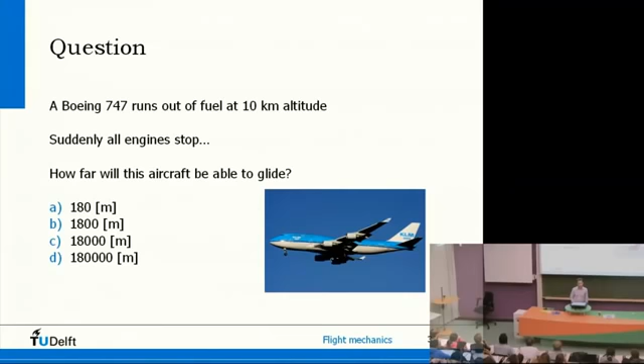Now, of course you want to know what the correct answer is. I've made a picture. This is if this happens above Amsterdam, then that circle, that's 180 kilometers. So the answer is D. That's what you can reach with this aircraft. So you can even fly almost to Brussels without engines operating.

Now, to come back to the lecture, this is typically a thing you'd like to calculate if you talk about flight mechanics. So what I'm going to talk about this whole lecture is aircraft performance, things like how far can you glide, how fast can you fly, how slow can you fly, how high can you go, or if you want to fly from A to B, how much fuel do you actually need, or what's the furthest you can fly. These are typical questions you should be able to answer at the end of my lectures, hopefully.

And that's for a given aircraft, you can do these calculations. But I will also talk a little bit about aircraft morphology. I'm not sure if you know what morphology means, but morphology is basically related to the shape of the aircraft. So if you know how far you can glide, you can think, well, what if I change my aircraft design slightly? Would I then be able to glide further or not? So aircraft design, wingspan, etc., is really much related to aircraft performance.

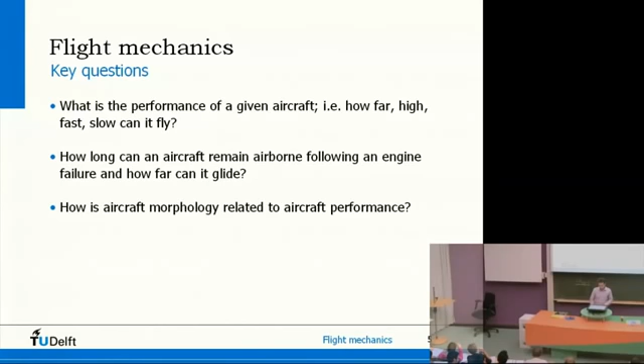So that's aircraft morphology. These are typical questions I'd like to answer, and it's important to realize that we try to analyze the performance of a complete vehicle. So it's not just aerodynamics, it's not just structures, it's not just propulsion. This deals with the whole vehicle, including the pilot, the atmosphere, and so on. So you can look at all these types of aircraft and do calculations about them.

And then next year there's a course on flight and orbital mechanics. Then you'll even start doing calculations about orbits and space flight. I won't be telling you that because I don't know anything about space. So in this lecture series it will be only about aircraft.

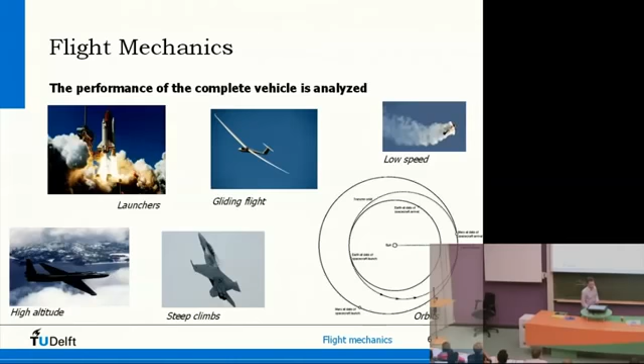So we're trying to analyze the performance of the complete vehicle. And of course, if you want to know how far it can glide or fly, you have to be able to describe the motion of the aircraft as a whole. So this is why basically the center of my lecture series is about the equations of motion of an aircraft. So that's basically F equals m times a.

So this is what we're basically going to do. It's not more than high school physics, really. But of course, the forces determine the acceleration of the aircraft and thus the motion. So you have to be able to understand all the forces that act on the aircraft.

This includes propulsion, aerodynamics, the aircraft structure, in the sense that the aircraft structure will have a certain weight. And you can imagine that maybe a heavy aircraft might perform less well than a not so heavy aircraft. The pilot has an influence too. Of course, the pilot can decide, am I going to fly high in the atmosphere or low, or what kind of strategy is the pilot actually doing?

So this will also influence the performance. And finally, the atmosphere. Of course, at high altitude or low altitude, you have different air density, different temperature, and these parameters affect the equations of motion and thus the performance of the vehicle.

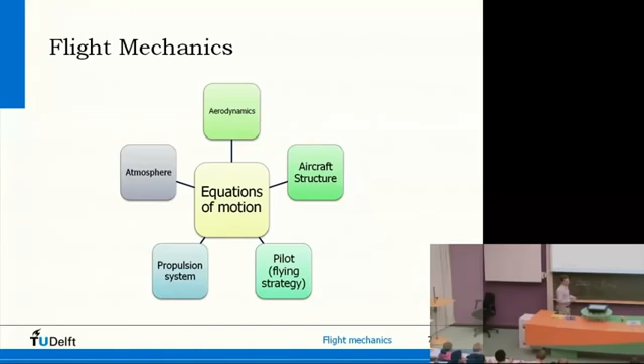So this is more or less what this whole lecture series is about. Hopefully you know now what flight mechanics is, more or less. Before I go into details of this course, just some practical matters like what book do you need, which chapters do you need to learn.

After that I'm going to treat three things basically: the general equations of motion, that's what you really should be able to do after this lecture, and points 4 and 5, propulsion and aerodynamics. They partly cover what you already know a little bit, but I'm going to extract what you know already to be able to apply it to the equations of motion. Finally, a summary and some additional stuff for the interested reader.

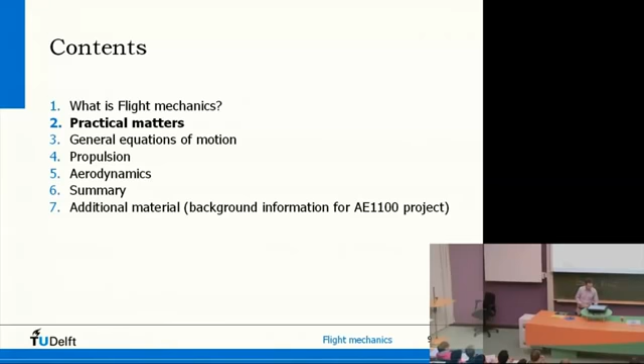So this is what I'm going to do. First lecture is more a general lecture, introduction, deriving equations of motion. And that's the tool really that we're going to use to solve all the questions that we may pose.

After that, I'm going to look at horizontal flight performance. So performance questions like how slow, how fast can I fly, what's the maximum distance I can fly if I stay at a constant altitude.

After that, it's going to be a little bit more involved. I'm going to treat climbing and descending flight, so the example I've just given, but also maybe if I want to climb to my cruise altitude, how fast, how much time does it take before I get there?

And finally, fourth lecture is the flight envelope. And the flight envelope is basically a diagram which more or less looks like this, with altitude and airspeed, and there will be some region in this flight envelope where a certain aircraft can fly. So there will be maximum speed limits, maximum altitude, minimum speed limits.

And within that region you can fly, and that's really important to the person that's operating the aircraft, because then you know what you can do with your aircraft. So this really tells you what the aircraft is able to do. Now clearly, airspeed and altitude, this flight envelope really depends on the altitude.

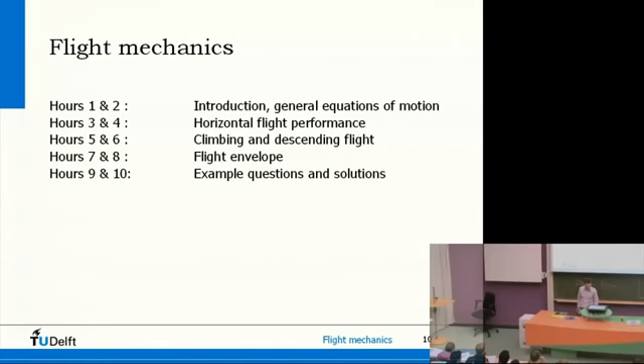Now, what do you have to learn? You have to learn the lecture sheets. If you understand the sheets that I show you in this lecture, then you know pretty much everything there is to know. There will be practice questions from previous exams on Blackboard, so you'll be able to look at them.

If you use Introduction to Flight, it's those paragraphs listed there, but I have to say that not everything that I'm telling you here today and in the next lectures is in fact included in Introduction to Flight. In addition, I don't think Introduction to Flight is a very good book. Well, it's a good book if you're interested in aerodynamics, but considering this topic, it's not a really good book, and they use different notations than I do.

So you can use it as background reading, but if you understand the sheets and you make some notes during this lecture, then you should have everything you need to know. There's also another book you could buy, it's only 14 euros, called Elements of Airplane Performance. It's not a waste of money because next year you'll need it anyway, so you might consider buying that. But that's up to you.

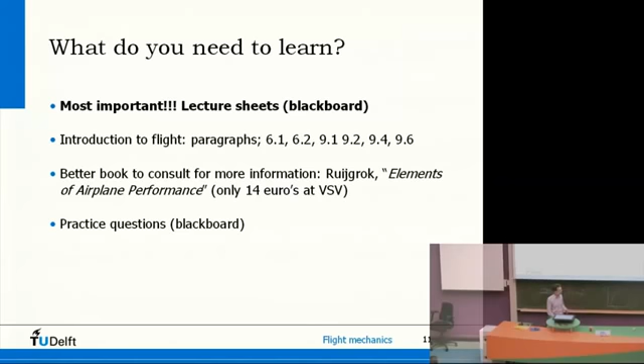Of course, everything I tell you will be put on Blackboard, but I will only put it on Blackboard after the lecture, so you have to wait for that. And there's no need to do any homework, so you can just come to the lecture and enjoy and pay attention, of course. But there's no need to really prepare for these lectures. Just pay attention, that's the most important thing. So,

General equations of motion, this is really the most important part of the lecture. So I'm going to derive equations of motion for an aircraft. And I'm going to do that in a couple of steps.

I'm going to talk a little bit about Newton's laws, stuff you should really already know. I'm going to talk about coordinate systems. You can imagine if an aircraft is flying through the sky, then you need to define some axis systems to specify what the orientation of the plane is.

Then I'm going to talk about some assumptions. We'll make some assumptions to make life a little bit easier. And then we'll derive equations of motion. So,

now to start with Newton's laws, this equation really only holds when you're in an inertial frame of reference. And what does that mean? That's a frame of reference, so a coordinate system with axes, which is fixed in space and it's not moving at all. So it's completely at rest.

Now, a coordinate system which is translating at a constant speed, you can prove that that's also an inertial frame of reference. And just to give you an example, let's say you were in a train and all the curtains are closed and the train is going at a constant speed, then, except for some vibrations maybe, you don't notice at all that you're moving. So you can jump in the train and you'll land in the same spot. So that's in fact an inertial frame of reference, and the equations of motion there hold.

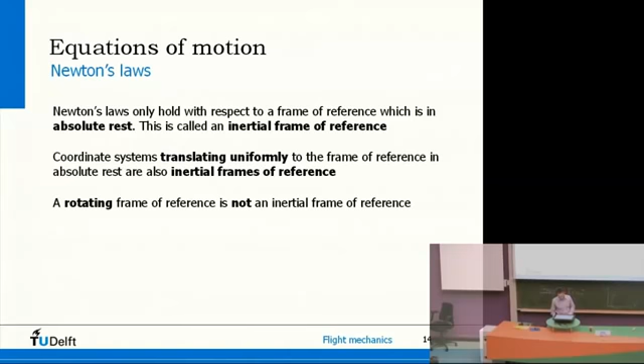But that's an important observation, because an aircraft which may be pulling up is, of course, going around the corner. So in that case, an axis system fixed to an aircraft is not in an inertial frame of reference anymore. So this is the basics.

And then for this picture, I would urge you to make a drawing. So take out your notebooks, I would say. If you would look up all the previous exams over the past couple of years that this course has been existing, I think there's been 4 exams, then in every single exam, there was a question whether you could draw this. So, I don't know much about statistics, but there's a fair chance that it will be asked again.

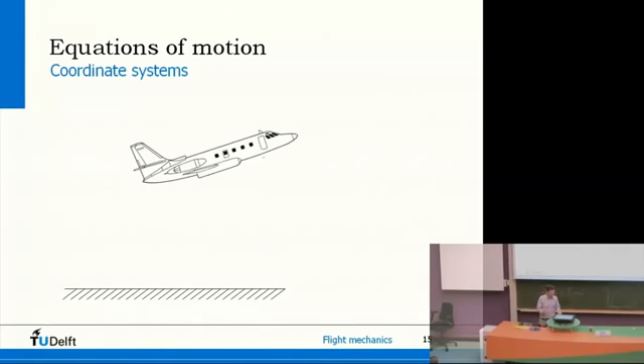So, coordinate systems, there are various coordinate systems you can actually describe. Of course, one that's really relevant and obvious is an axis system which is fixed to the Earth, like here. So basically, this is what we call the Earth axis system. Out of convention, you can choose whatever direction the x-axis is located. It doesn't really matter a lot if the aircraft is flying in that direction or in that direction for your calculations. So the x-axis, you're free to choose which direction it is.

The z-axis here is pointing to the center of the Earth. Now that's just an agreement. You could have chosen it the other way. This is the way it is, and it's completely fixed. So this thing is fixed to the Earth, it's not moving.

Now, of course, the plane is moving around. So you could also say, I take this Earth axis system, I take the same orientation as the one fixed to the Earth, but now I fix it to the plane. So this is what we call a moving Earth axis system. So it's the same axis system, same orientation, it's just traveling along with the plane. And that's quite convenient.

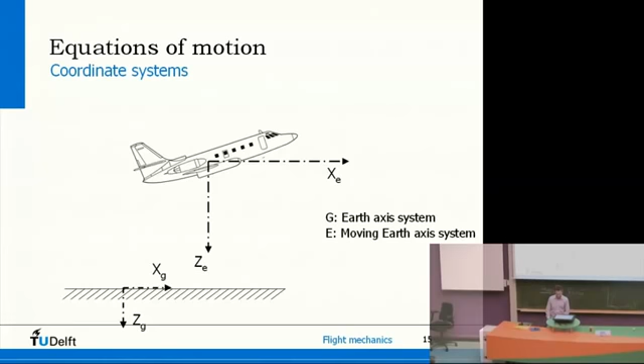Now, once you have this, then of course you can imagine there will be other axis systems, because a plane is not always in a horizontal attitude. So what we can also define is what is called a body axis system. Now, the body axis system is fixed to the plane, and the x-axis is pointing through the nose of the aircraft. So you can see straight away that there's an angle called theta.

Let's see if this works. Oh. I'm not very good at these things.

Well, doesn't work. So there's an angle theta between the moving Earth axis system and the body axis system. And the important thing to realize is that that's basically the angle between the nose of the aircraft and the horizon. So that means that the pilot, if he or she looks outside the window, is actually seeing that angle theta. So that's quite relevant from the pilot's perspective. Now again, the z-axis is just perpendicular to the x-axis.

Then, of course, and this is quite important to realize, there is something called the airspeed vector. And that vector indicates in which direction the plane is going. And that's of course interesting, because that determines the performance, where you're going.

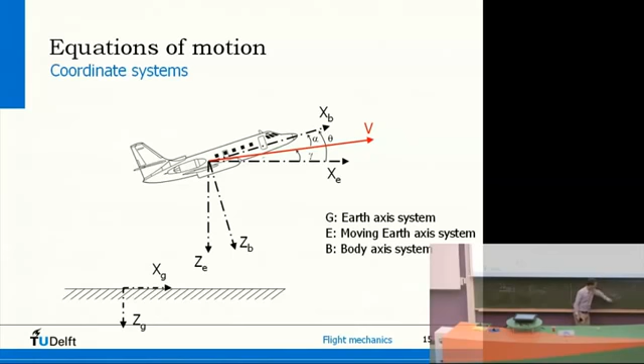Finally, last but not least, is this angle gamma. And this is what we call the flight path angle. So the flight path angle gamma, that's the angle between the horizon and the airspeed vector. And it basically tells you how steep you're actually climbing or descending. So if you consider the case of the plane without engines, then the airspeed vector would be pointing down, and this will be minus the flight path angle. And of course that angle determines where you're going to land. So that's a really relevant angle.

And then finally, we can define an axis system, which is called the air path axis system. And this axis system is in the same direction as the airspeed vector. So we basically have three axis systems fixed to the plane and three angles describing the differences between the three axis systems. Okay, so these are the coordinate systems we have.

Now, these angles: theta is called pitch attitude, alpha is called angle of attack, and gamma is the flight path angle. And these angles, at least theta and gamma, are called differently in the book Introduction to Flight. But all the other books use these notations, so that's why I'm using these as well, to avoid confusion. Now we have all the relevant angles.

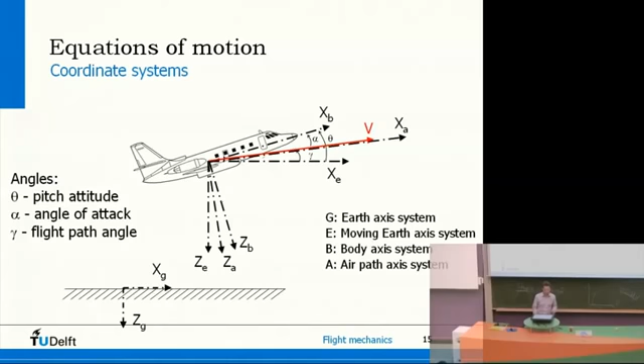And before I start deriving these equations of motion, just a few assumptions I'd like to emphasize. Now the first one I assume is that the Earth is flat. You can see that if you would stay at a constant altitude, like so, then if you fly long enough, you're actually flying around in a circle around the Earth. Now, in order to achieve a circular motion, you need a centrifugal force. And what I'm going to assume is that the Earth is flat. And just a little calculation to show you that that is relevant.

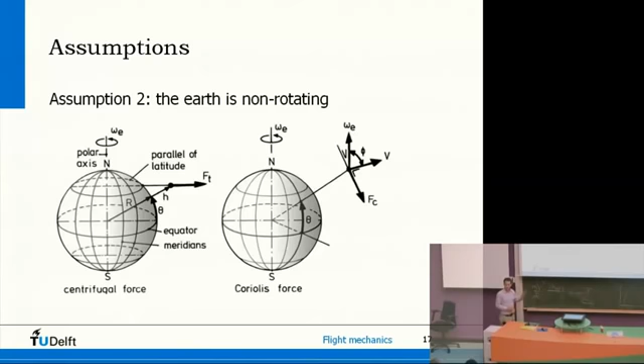So it's kind of comparable to, let's say, one of these discos where you have a dancing floor that turns around. If you're in the center and this thing is rotating and you'd walk outside, then you'd feel that the speed is increasing and you'd feel force. So these forces are present if you consider the rotation of the Earth. So that is a relevant thing, and it's actually something you can measure.

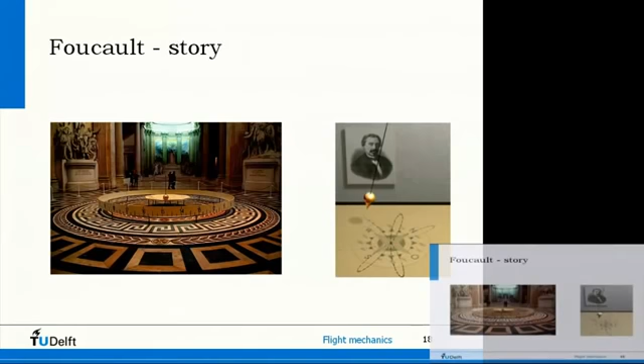Now, it takes a long time. It takes a day before the whole cycle is complete. So you can imagine that these forces are quite small, and that we can actually neglect them now. But it is something you have to pay attention to next year if you start looking at orbital mechanics and spaceflight. Final assumption, I'm going to assume that gravitational acceleration is constant.

And that's in fact not completely true. If you go into space and a mass is further away from the Earth, you would notice the Earth to a lesser extent. So gravity is not constant, but if you consider normal aircraft flight up to say 80 kilometers, then gravitational acceleration is almost the same as at sea level. So that's, I think, a fairly relevant assumption.

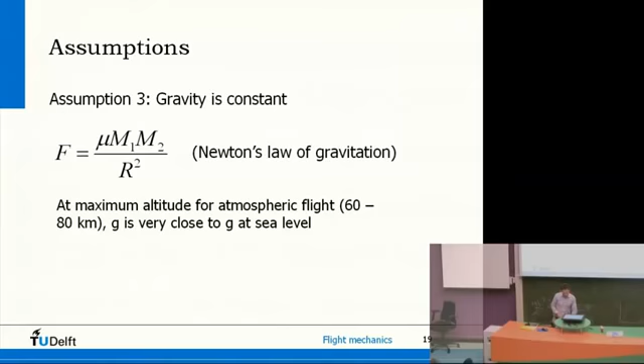Final assumption I'm making is that I'm going to treat the aircraft like a point mass. I'm going to treat it like a little ball, basically, and see what kind of motion it will make. So these are the basic assumptions. And now back to our equations of motion. So this is the picture I just made before. And what I'm going to do now is make a free body diagram with all the forces, and a kinetic diagram with all the accelerations of the plane. Combining those will give us the equations of motion.

So let's just list which kind of forces are acting on the plane. Now, clearly there's an aircraft weight, and you can imagine aircraft weight is always pointing towards the center of the Earth. So that's in the same direction as the z-axis of the moving Earth axis system. So you can see straight away that these axis systems will become relevant right now. Now, aircraft weight, that's quite obvious, I guess.

But now let's have a look at the lift vector. And lift is by definition always perpendicular to the airspeed vector. So that's something to pay attention to, because in most courses you just consider, say, horizontal flight, and then lift is pointing upwards. But you could imagine if you're flying straight up with a fighter aircraft, then lift is actually pointing in that way. So lift is perpendicular to the airspeed, by definition. So it's in this air path axis system, in the XA and ZA axis system.

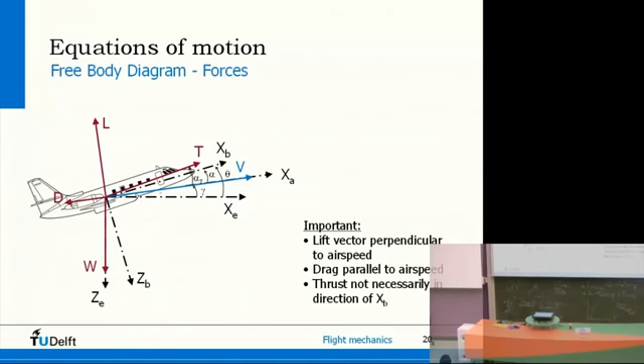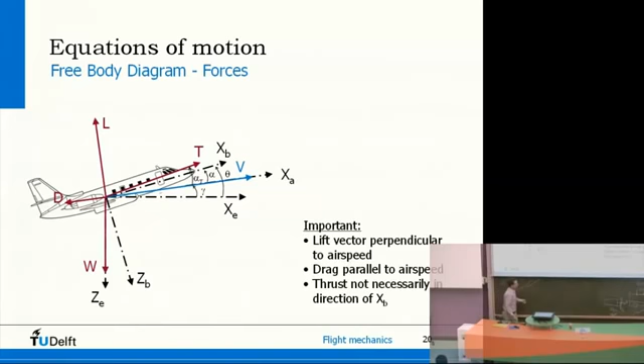The y-axis is in fact pointing outside the board, but L is perpendicular to the airspeed vector. So by definition, it's okay.

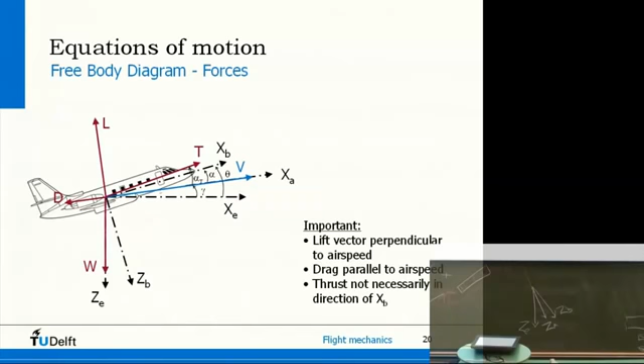Then back to the accelerations, and we're almost at where we want to be: the equations of motion. I've taken forces parallel and perpendicular to the airspeed, so I'm also going to take accelerations in these two directions. You can say that the airspeed may increase or decrease with time, so you may have a change of airspeed with time in the direction of v. That's a fairly simple acceleration.

So if you complete the equation of motion here, you'd have mass—aircraft weight divided by gravity—times dv/dt. Now there may also be some kind of vertical acceleration. You know that if you have an acceleration perpendicular to the speed vector, you will start to go in a circular motion. Basically, if you're in a car driving straight and you apply a force to the right, you start to turn right, really simply. So you can imagine there may also be a vertical acceleration of the plane, and such a vertical acceleration will make the plane go in a circular motion like this.

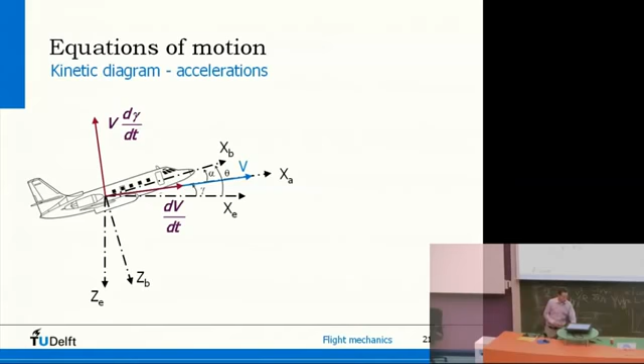So the equations of motion become this: we have a vertical acceleration times the mass, and we end up with these two equations. We have one plane, able to move in two directions, two-dimensional space. We're treating it basically like one mass moving around, so we end up with two equations of motion that describe what the aircraft is doing. That's all for this hour. In the next hour, I'm going to look at what all the forces in these equations actually are and how they behave.

If you can all sit down in the back. I just concluded with two equations of motion. I tried to get the pen working, but I was actually drawing on the other side of the screen, so I'm going to continue with the chalk. I got about 10 times the same question during the break, so before I continue, I want to make one thing clear.

If you're traveling in a circular motion, then the velocity is always tangent to this circular motion. The angle you have here is gamma, flight path angle, with respect to the horizon. If you're in circular motion, and you call this omega, the angular velocity, and this the radius, then omega times r equals the speed.

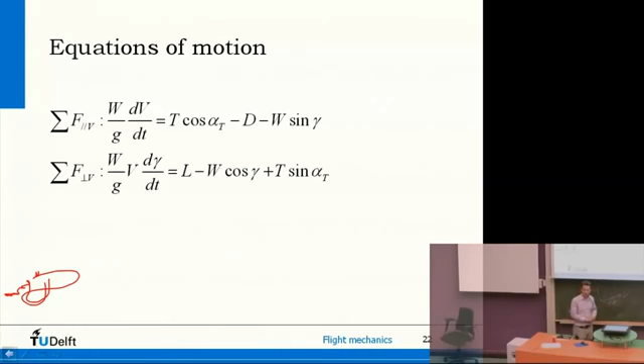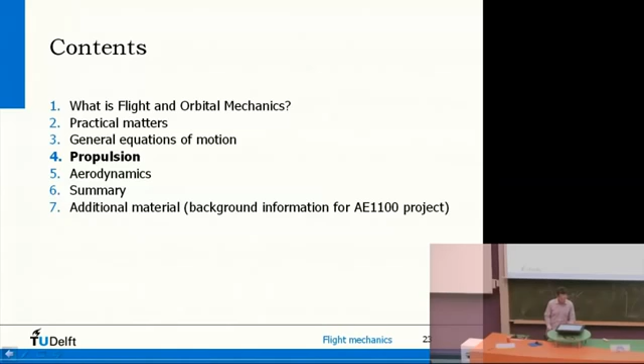What you see in these equations is I'm talking about real thrust, real drag, real lift - not a lift coefficient, not a drag coefficient. I really want to know what these forces are. So I'm going to look at some equations you should already have seen in this lecture or in previous lectures, Introduction to Aerospace Engineering, but I'm going to change them a little bit and highlight what you need for this lecture. Some of the things you've already seen, but it's just a refresher, adapted to apply in the equations of motion. So in terms of propulsion, I'll look at some fundamental equations and definitions.

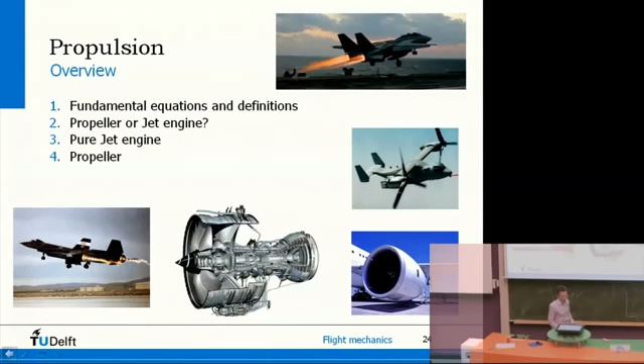So the most fundamental thing is to realize that if you have a propulsion system, no matter which one you have, they all work in the same way. They all somehow take a bit of air and accelerate it. And by accelerating air, you create a force through the momentum equation.

Basically, the momentum of the mass flow of the air at the exit of the engine compared to the momentum at the entrance, the difference between the two, is actually the force that is created. One important thing is that when I talk about mass here, it's actually a mass flow, so the units are kilograms per second. I could have put a dot on top of it, but it's a mass flow.

I is the, well, maybe in Dutch you'd call it impulse, but in English it's momentum. So it's also impulse? Okay, well. So it's mass flow multiplied with V. Momentum would be mass times v, and the derivative with time is then what you have here.

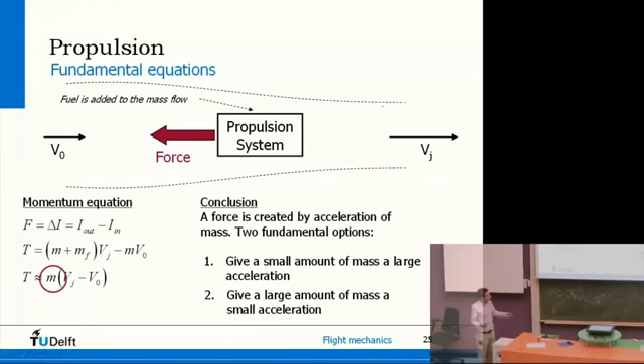Then you would be playing with this jet velocity. Whereas you could also say, I'm not going to do that - I'm actually going to take a lot of air and give it a little push, and you get the same amount of thrust. So you can do two things: take a lot of mass with little acceleration, or a little mass with a large acceleration, or anything in between.

And that's really the difference between all these types of propulsion systems. So that's important to keep in the back of your head.

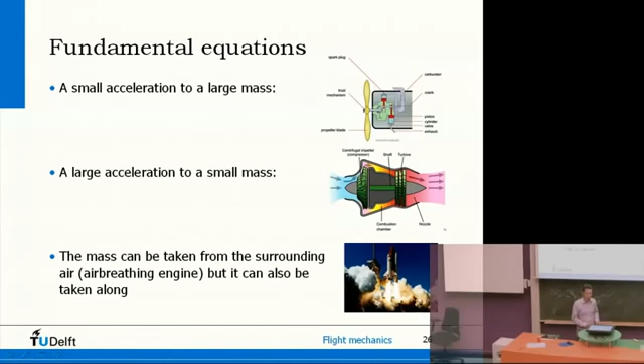Or a small mass. And finally, not really the topic of this lecture, but you could also take the mass with you in a rocket, and then you can also create a force.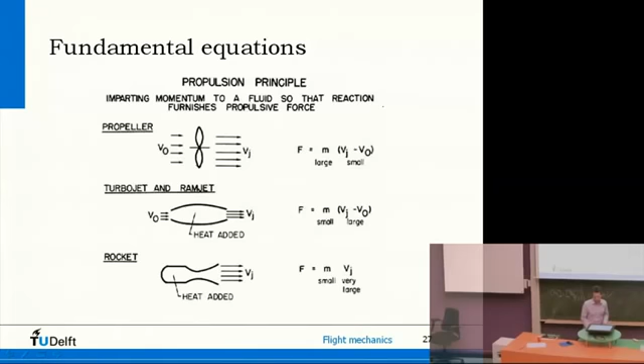So, if you look back at the equation, for the propeller you have large mass flow and small speed difference, and for the jet you have a small mass flow and a relatively large speed difference.

But then you might wonder, okay, which propulsion type is actually the best? Propeller, maybe a pure jet like you have on fighter aircraft, maybe a turbofan, which is a bit in between a pure jet and a propeller, like you see in civil aircraft. Maybe a ramjet, that's more a special case, or a rocket.

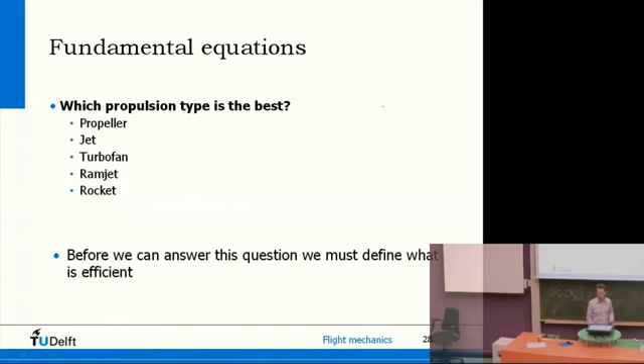But before you can answer that question, you have to say, okay, if you want to define what's best, we have to define what do I mean with best? Do I mean a lot of thrust, or a very efficient engine? So we have to make some definitions first before we can compare different types of engines. We're going to look at three definitions. We're going to look at power, basically energy per second.

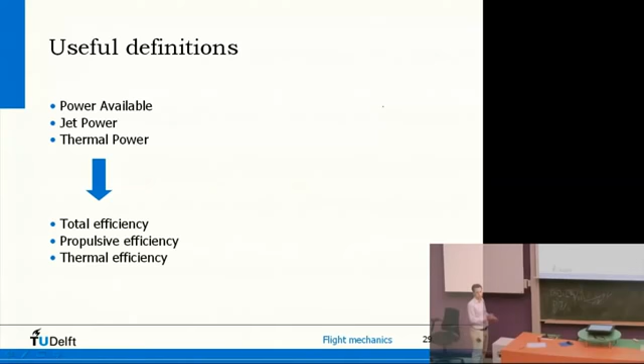So power, and we're going to look at efficiency, which we express in terms of a percentage. We're going to look at a couple of powers, and I think 2 out of the 3 you've already seen, and a couple of efficiencies. With these efficiencies, we'll be able to compare different engines.

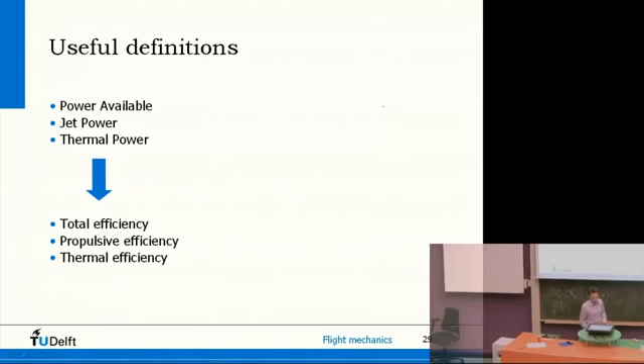Now, power available is fairly straightforward. What you typically want to do with an aircraft is fly from A to B. At time t you might be on the left, and at time t plus delta t a little bit further. You have a thrust force in order to get there, and you travel over a distance delta x. If you look at the amount of energy it takes to get from A to B, there's something called work, which is basically force times distance, and that's energy. The force in this case is thrust, the distance is delta x, or x2 minus x1, and that's the energy you need to go from A to B.

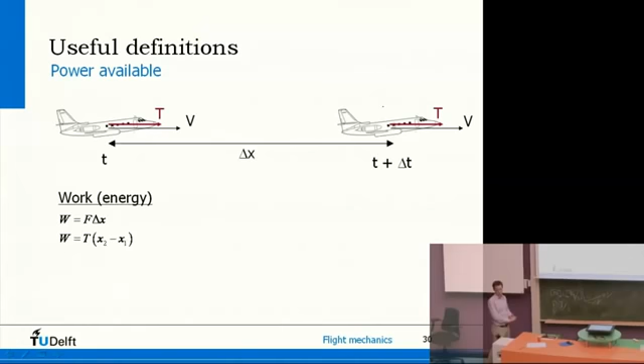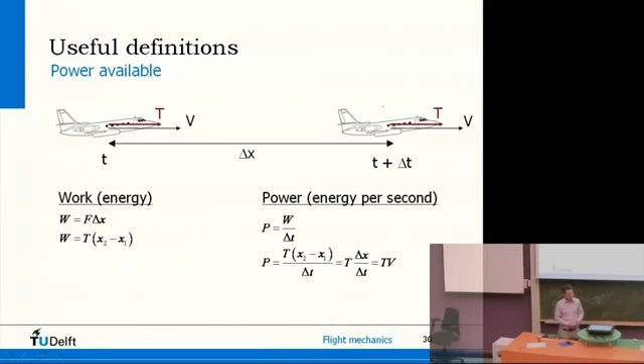Now I'm not really interested in the energy, I want to know what is the power that I need. Power is energy per second, very simple. Power then is work divided, so energy divided by the amount of time it takes.

You have thrust times delta x, which is the work, the energy. You have time delta t, and you can see straight away delta x over delta t. If you make the delta small enough, you'll get the change of distance with time, which is airspeed. So this power is what we call power available, because it allows us to go from A to B, the power you have for transportation. This is the most interesting thing. So power available is thrust times velocity.

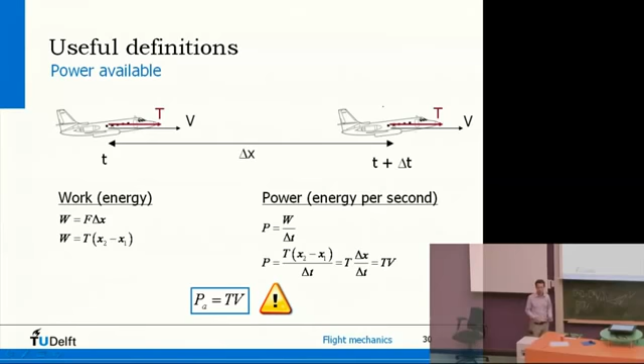Of course, there are some other powers you can define, because we're accelerating mass in order to get a thrust force. So you can imagine there is a change in the kinetic energy of the air. We can also define something called jet power, which is basically the change of kinetic energy of the flow. If you look at the front of the engine, kinetic energy would be half mv squared, and at the end of the engine it will be half mvj squared. As I said before, m there is a mass flow, in kilograms per second, so that's basically energy per second. So it's a change of kinetic energy per second. Pretty straightforward, and that's what we call jet power.

Now that's an important one, because you can imagine that after the plane has passed, the air is moving backwards. You've accelerated it, so you're losing energy in the air, and that will basically affect the performance.

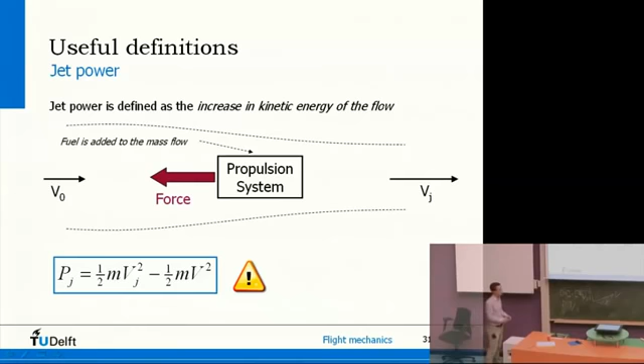Now, I've talked about jet power, energy left in the air, and I've talked about power to go from A to B, the interesting part for the person flying it. But of course this energy has to come from somewhere, and it comes from the fuel, from burning fuel. So the final power, the third one we can define, is called thermal power.

If you look at the top equation, Q, which we call thermal power, is the mass flow of the fuel, so kilograms of fuel per second, multiplied with H. H is the heating value of fuel, and it's just a constant. It tells you that if you buy a liter of fuel, how much energy is inside it. It's kind of a chemical quantity, a constant value, just a number. So mass flow of fuel multiplied with this constant value H gives you the thermal power you put into the system in order to transport.

Since mass flow is in kilograms per second, you can also define it with what we call fuel flow, F, and fuel flow is in newtons per second. So if you look at the bottom equation, you have fuel flow over gravity. That's basically the mass flow of the fuel multiplied with this chemical quantity of the fuel, which gives you the thermal power. So all this says is if you open the fuel flow, giving more thrust in the cockpit, you'll use more thermal power.

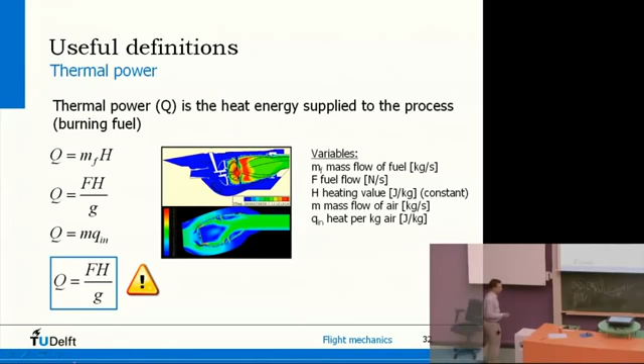But now let's have a look at efficiency. I'm going to define total efficiency as power available divided by thermal power, because power available is the power related to flying from A to B, and Q, thermal power, is basically the amount of fuel you need. So this total efficiency tells you how efficient you transfer the fuel into transportation.

Now, you can understand that jet power divided by jet power is equal to 1. So I've multiplied total efficiency by jet power divided by jet power, then rewritten it as power available divided by jet power, multiplied with jet power divided by thermal power. If I do that, I can make a distinction in efficiency: total efficiency equals power available divided by jet power, which we call propulsive efficiency, multiplied with jet power divided by thermal power, which we call thermal efficiency. So I just made a distinction between two efficiencies.

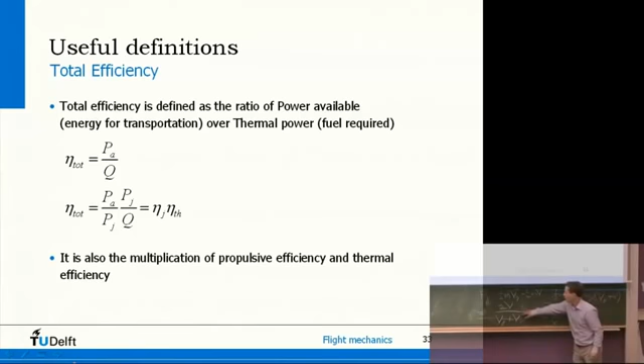So I end up with propulsive efficiency being, I hope it's readable, 2V divided by Vj plus V, and I can also write this as 2 divided by 1 plus Vj over V. So in this final step, I'm dividing the top and the bottom by V.

So this is an expression for the propulsive efficiency. It's just a function of jet velocity and the speed at which the aircraft is flying.

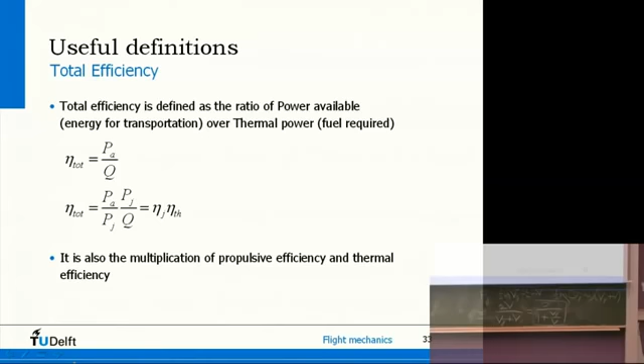Now if you take that equation, then if Vj is equal to V, you would find that propulsive efficiency is 1, which is 100%, which is good.

But, of course, thrust is basically mass flow times the change in velocity. So if you start creating thrust, the jet velocity will be higher than the airspeed, and therefore this eta j, which depends on these two terms, will always be smaller than 1. So in order to transport yourself, you have to accelerate air, which means you leave energy in the air, which means the efficiency of your system is always smaller than 100%.

So you cannot transfer all the fuel energy into transportation because you leave energy in the atmosphere. So if you look at this, you see this efficiency is actually dropping as the ratio between jet velocity and airspeed becomes larger. So a large acceleration of the mass leads to a lower efficiency.

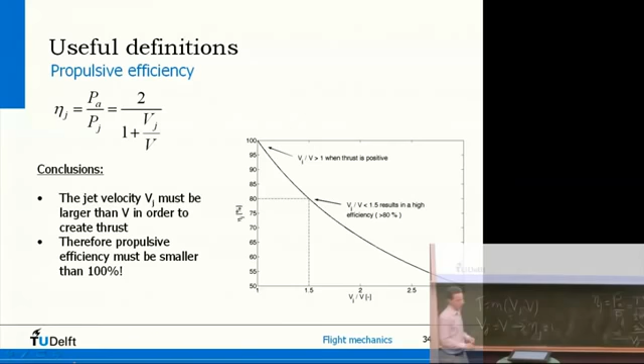And this is something you can actually use to compare different propulsion systems. So what I'm going to compare are propeller aircraft and jet aircraft.

Now this example - if you can just be a little bit more quiet in the back.

In this example, I'm going to create 100 newtons of thrust, but I'm creating it at two different airspeeds. So in option 1, I'm flying 100 meters per second, and in option 2, I'm flying 200 meters per second. Now I say let's keep the mass flow the same. 1 kilogram of air per second goes through the engine. I'm giving the air the same acceleration, so an increase of 100 meters per second, and in both cases I get 100 newtons of thrust.

But you can see immediately that the thrust is identical in both cases, but this ratio of Vj over V is not the same, because in one case it's basically 200 divided by 100, which is 2. In the second case it's 300 divided by 200, which is 1.5. So you can see that if you look at the first option, then the propulsive efficiency, if you type in the numbers, is only 66%. And in the second option, propulsive efficiency is in fact 80%.

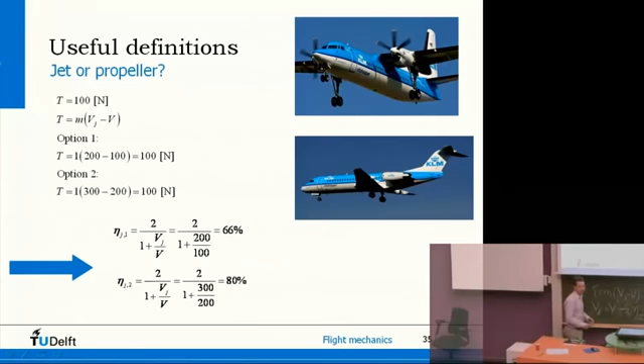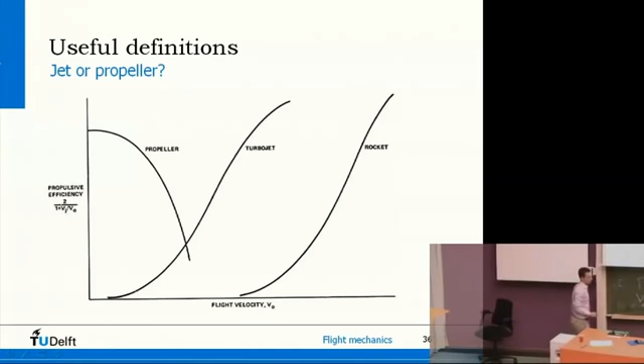And this is why you see that the question whether you need a jet or a propeller... a propeller isn't worse than a jet. In fact, even though it may look older, a propeller is better at lower speeds and a jet engine is better at higher speeds. So basically for each speed at which you're flying, there is a certain propulsion system which is most efficient. So at low speeds you might want to use a propeller. At high speeds you might want to use a jet. And at even higher speeds you might want to start using things like a rocket or a ramjet or other exotic propulsion types. So there is no answer to the question.

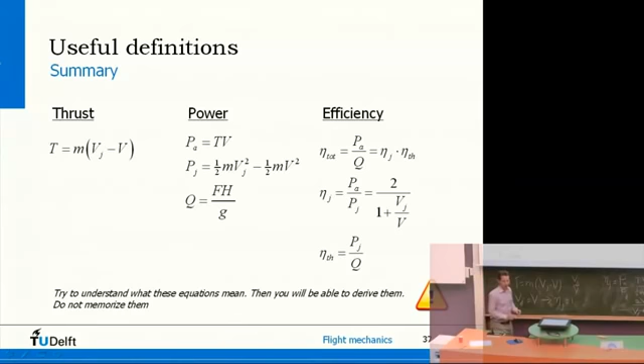But what I talked about so far is propulsion systems in general, but let's now have a look at two different types of propulsion systems and how they actually behave. So we have a jet engine, which is one case I'm going to treat, and a propeller engine is the other option. And a jet engine more or less works like this. Air comes in at the left-hand side, and this air is actually standing still and the engine is moving. But in this picture the engine is of course still. So air comes in and then it sees this engine, so it gradually has to reduce the speed, and when it does so it compresses a little bit. So the pressure increases a little bit in front of the engine.

Then it's going inside the first bit, which is a compressor. So these green discs, actually one green disc is rotating and the next disc is standing still, and then another one is rotating again. And what this thing is doing is it's putting energy into the air and then stopping it again. And by doing so, it increases the pressure of the air. So how it exactly works at this moment is not so important. What's important to realize is that after the compressor, the air pressure has increased by maybe a factor 30. So you started with atmospheric pressure, then you had a little pressure increase because the air hit the engine, and then inside the compressor the pressure increases a lot.

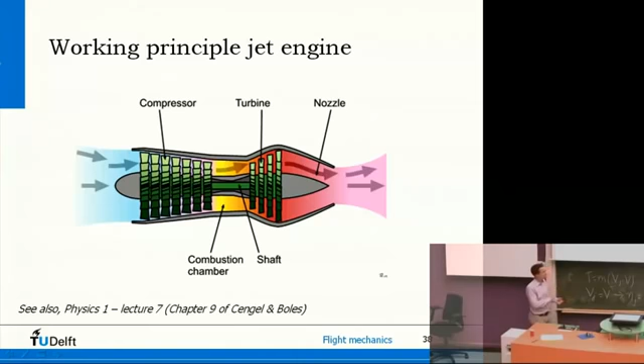Now, because it starts to rotate, a part of the energy is extracted out of the air, and the turbine is basically used to drive the compressor. But since we put a lot of energy into the gas in terms of kerosene or fuel, there's still a lot of energy left after the air has passed through the turbine. And then, since there's still energy, it will accelerate when it exits the engine. It goes through the nozzle in order to make it expand nicely. And of course, the air there has a higher velocity than at the entrance, and the temperature is also higher.

Now, just summarizing, at the intake I said, well, the air comes kind of to a standstill in front of the engine, and that makes the air pressure increase a little bit at the intake. But that compression at the intake is quite low. Maybe pressure increases by 50%, but it's really negligible compared to what happens inside the engine.

So inside the engine, the compressor makes the compression ratio up to a factor 30 or 40. And the jet velocity at the end is very high. Now, as you can see, this jet velocity really depends on what happens inside the engine, because there the air gets compressed a lot, and the engine doesn't really sense that much what happens in front of it.

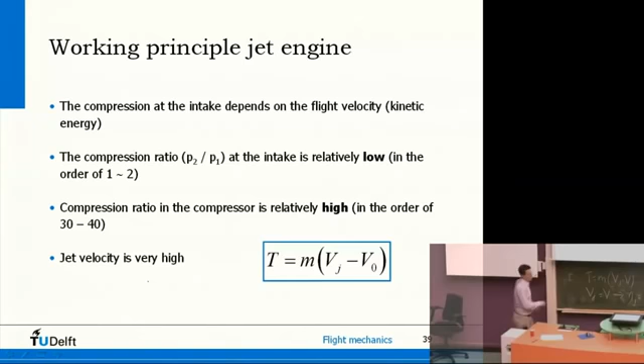So if you would make thrust a function of airspeed, then it looks more or less like this. So you can see these lines. Let's just take one maximum continuous thrust, so that means you give full power in the cockpit. Then the thrust line as a function of airspeed, if you evaluate your engine at different airspeeds, doesn't really change that much. Of course, maybe if you go faster, there's a slightly different mass flow.

Of course, this compression in front of the engine is a little bit different, but overall it's pretty much a straight line. You could make this diagram on the left for a lot of jet engines, and they all look more or less the same.

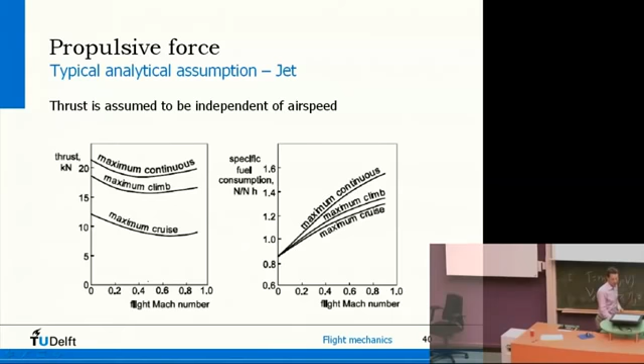So if you would take this thing on the left and you'd simplify a little bit for our flight mechanics lecture, then what you can assume is that this thrust for a jet engine is more or less independent of airspeed. Of course, if you give more fuel flow in the cockpit, you get more thrust, and if you give less fuel flow, you get less thrust. But if you don't change anything, you just fly faster, you don't really notice it in terms of thrust. And this is a nice thing to have, because thrust is something we need in our equations of motion.

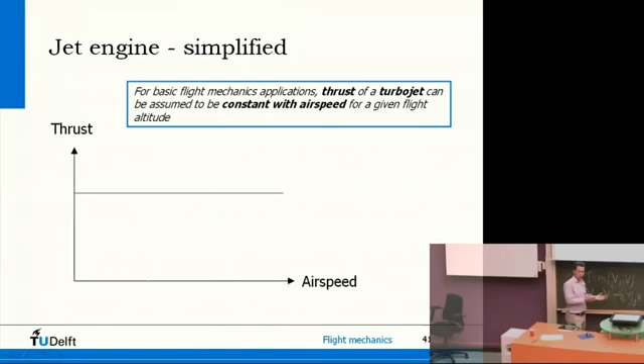Now that's the jet engine. Then let's have a look at propeller aircraft. And basically what I want to do is, I want to end up with a similar graph like this, but then for propeller engines. And if we have those two, then we have the most important propulsion systems which we can apply in flight mechanics.

So you have this high pressure gas in the combustion chamber which tries to expand. It's very warm. It goes through the turbine, but in a turboprop you actually have a little larger turbine. So instead of letting the air out at the end at a high velocity, you use that energy which is still left in the air actually to drive the propeller. So there's a shaft going to the propeller. There might be a gearbox to make the propeller rotate at the appropriate speed. But basically, all the energy is used to drive the propeller instead of accelerating the air.

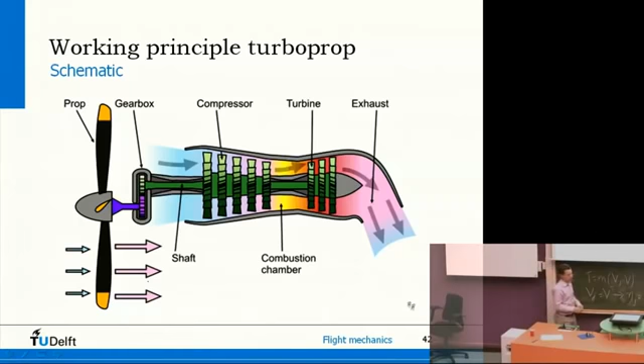So if you look at the airspeed at the intake of the gas turbine and at the exit, then they're more or less the same. But of course the propeller is rotating, and the propeller is the device that's actually accelerating the air and creating thrust. So, of course, if you consider a propeller, then in front of the propeller there's a certain airspeed, and since the propeller is rotating, it's actually accelerating the air backwards.

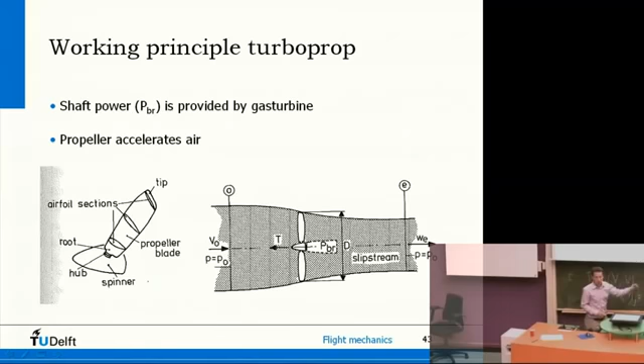But how does that actually work in detail? Now this is a picture you then have to look at for a couple of minutes maybe. But if you consider a propeller blade, then this is actually quite similar to an aircraft wing. If you make a cross section like it's done over there, then that cross section is in fact just an airfoil like on a wing.

So if you look at that cross section, then it's actually traveling at a very high speed just because the propeller is rotating. So this cross section has a large speed due to the rotation. Now, of course, the propeller as a whole is also traveling forward, which is V0. So the cross section sees the combination of these two velocities. So omega r and V, together you get some kind of a total velocity.

And the angle between the actual cross section and the total velocity is then the angle of attack of the blade section. And of course the angle with this horizon is what we call beta, and that's simply how you design the propeller. So that's a geometrical thing. That's an angle you've given the cross section.

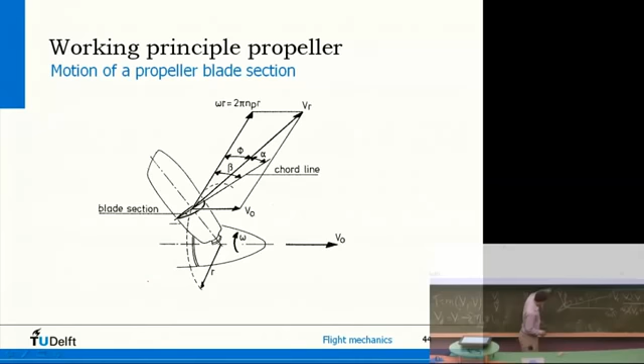Now of course, because you have an angle of attack here, you get lift and you get drag. And that's very nice, of course, because the lift basically creates your forward thrust. And you more or less create lift by, if you look at a wing of an aircraft, and air flows by, then the wing actually pushes the air down. So this is how the propeller accelerates the air backwards. So what we see is air accelerates through the propeller.

Is there a question? Yes. Good question.

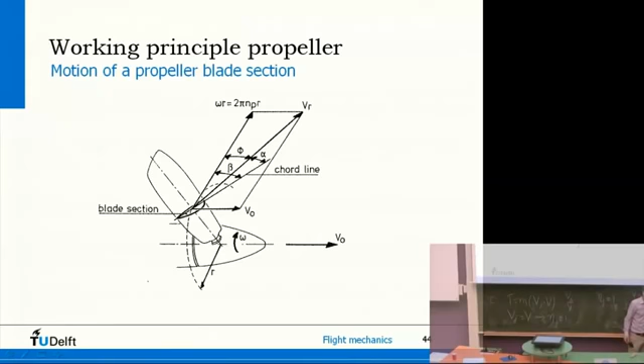The question is, does this blade have to have different geometry at the outside or the inside? It does, because you can see that this omega r, omega is how fast the propeller is rotating and r is the radius, then the angle of attack depends on the radius. So if you're at the tip of the blade, you have different r, so different angle of attack. So you see the propeller blades kind of are curved like this, in order to have the same angle of attack along the whole propeller.

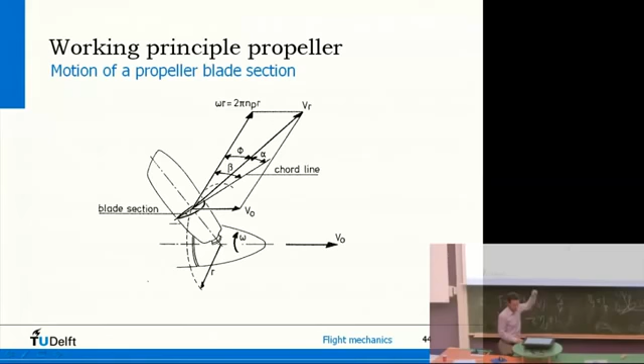Skip this. I just need 2 more minutes I think.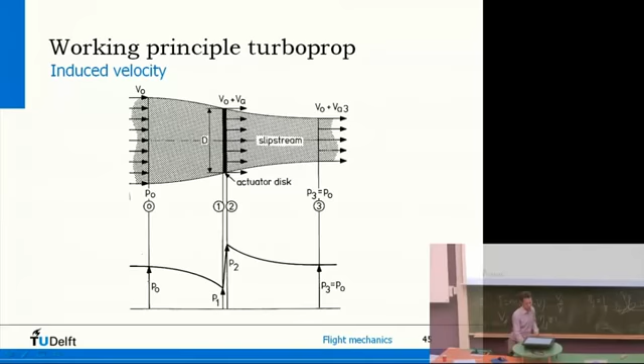One thing you have to be aware of is that this picture I've drawn here isn't completely true, because the air is actually accelerated through the disc. So the airflow at the disc of the propeller is a bit higher than the actual airspeed of the vehicle. So if you make the full picture, and I don't say you have to do this yourself, this is just for information, then there is an additional velocity, Vi, which is because air is going a bit faster through the propeller, so this affects the angle of attack a little bit. But we don't really need that now.

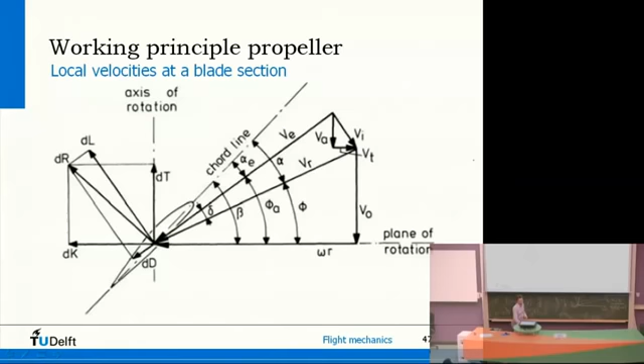All we need to know is that the geometric angle of the profile affects basically the angle of attack of the local blade section, and therefore it affects the lift and the drag. So you can imagine that since the forward velocity also affects the angle of attack, then maybe if you fly faster, it would be nice if you could change the pitch or this angle of the blade.

I just need 1 more minute, so just be patient.

If you see a propeller operating at takeoff, so no speed, then you could have a different attitude of the propeller compared to when you're flying forward in order to have the same angle of attack. So most propellers of turboprop planes, they can actually change the pitch of the blades during flight. So if they go faster, they change the blade angle. Maybe if they have an engine failure, you could put it such that it doesn't create that much drag, so you can glide well. And actually when you're landing, you could actually make reverse thrust with a propeller. So this is a nice feature.

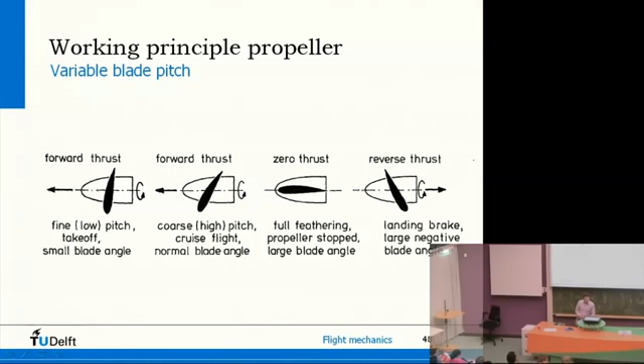And because of this, if you make a picture of the efficiency of the propeller as a function of J, and J is basically a non-dimensional velocity of the plane. So if J is 2, you're flying faster than J is 1. And what I've shown here are efficiency curves for different angles of this propeller blade. So you can imagine that you get the best efficiency at a certain angle of attack, because then you have the best lift over drag ratio.

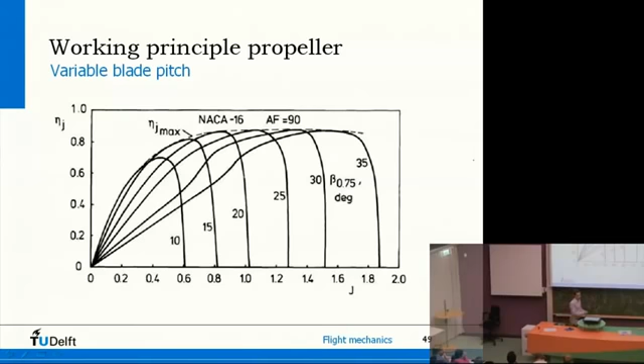And this efficiency occurs at a different speed for each blade setting. So what's nice now is that you can play with the blade setting as a function of airspeed to get maximum efficiency for each airspeed. So if you look at this efficiency curve and you change the blade pitch throughout flight, then you could achieve maximum efficiency. And this is the final thing, this is why we can assume that for a propeller aircraft, since we can apply different blade pitches throughout the airspeed range, power available, which depends on this efficiency, is pretty much constant as a function of airspeed.

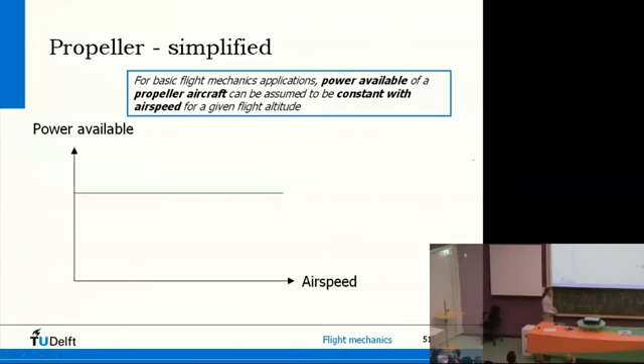So this is all I wanted to say about propulsion, and in the next lecture I'll tell you a little bit about aerodynamics.